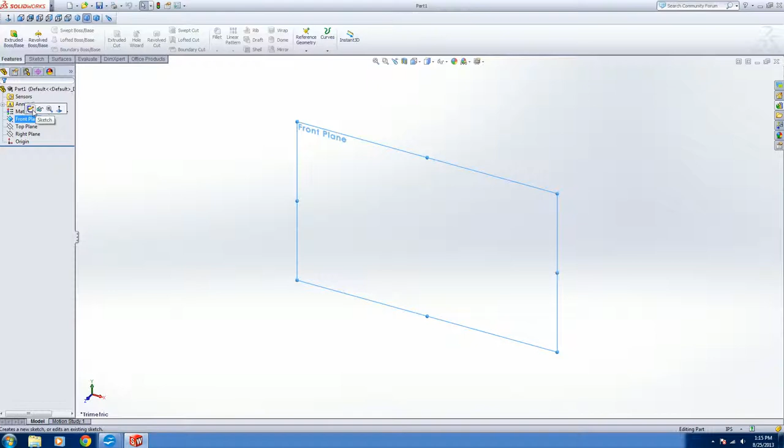The first thing you want to do is select a plane. There's a front, a top, and a right. It currently does not matter, so I'm going to select the front. You may see this little box come up. You want to select Normal To. If you did not see that little box, that's fine. You just come up here to View Orientation, and Normal To is right there. You can also select that. If you select it again, it flips you to the other side. There's not too big of a difference.

One of the most important aspects of the part is that you need to have a sketch. Because we're going to make a cube, you want to select Sketch. Actually, selecting just Sketch doesn't do anything. You have over 12 options. It looks like there's only 12 here, but you can do things multiple different ways if you select the drop downs. So I'm going to click on the corner rectangle, and I'm just going to draw right here a rough square. It's actually not bad. It's one of the best squares I've drawn freehand.

However, we don't know if this is exactly a square. What you can do is select a side, make sure you deselect it like I just did. It was light blue and now it's just a dark blue. And you can change the length under the parameter section to, let's go with 2. Now you see that it has made the adjustment. You can still move it, but when you put that in, it sets it for 2 inches. Smart Dimension, however, locks it into place. If I select this, I can change this value. And not only does it display 2 inches, but it makes sure that it is 2 inches.

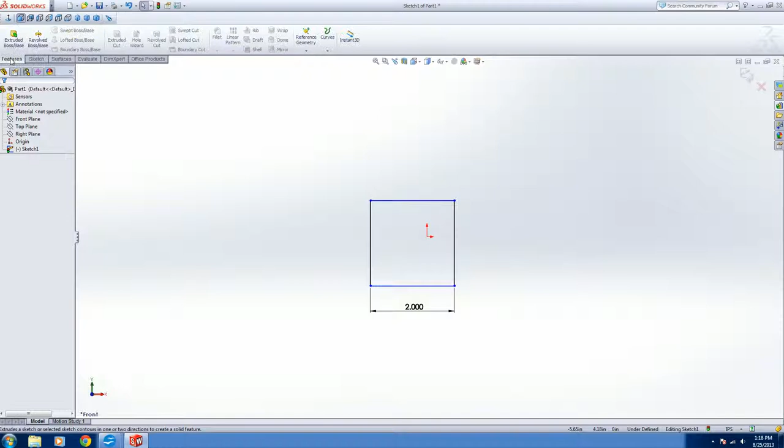Geometry. So what we're going to do is click on this other tab, Features. You're going to select Extruded Boss/Base. And you may notice now that it looks a bit more 3D. There's this yellow square-like thing coming out. This is the extrude, and this is what controls how much is coming out. Here it's only 0.1 inches. Let's change that to 2.

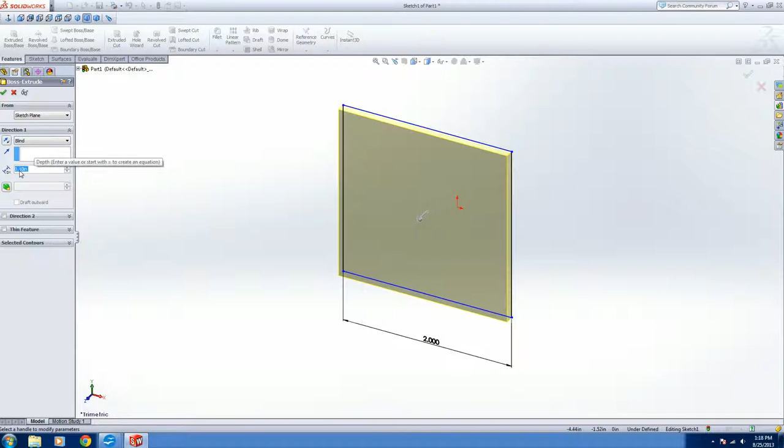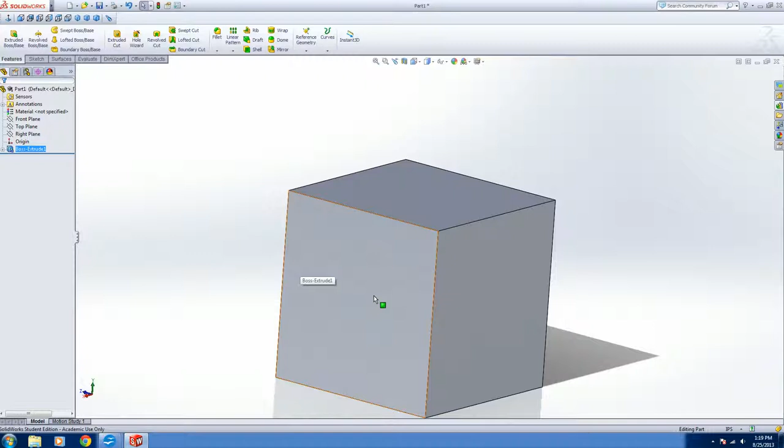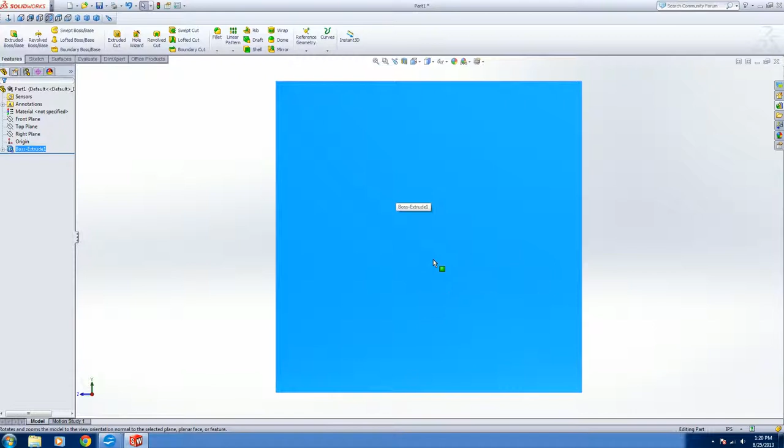I'm going to show you now how to do the extruded cut. Now we extended it this way. For this example, it is crucial that you cut here or on the other side of this one, on the same front plane-ish. Oh, sorry. This was on the right plane, I believe. So I'm going to select this face, and I'm going to bring it Normal To. And now that we actually have a model in here, we can use the faces of our object as planes as well.

So you have this plane, and I'm going to draw this rough square. I'm going to use Smart Dimension on each of these sides. So I'm going to select this edge and this edge. Oops, I did not select the edge. I'm going to select this edge and this edge. And you notice that it pops up a value in between. I'm going to say 0.2. I am going to do the same for these.

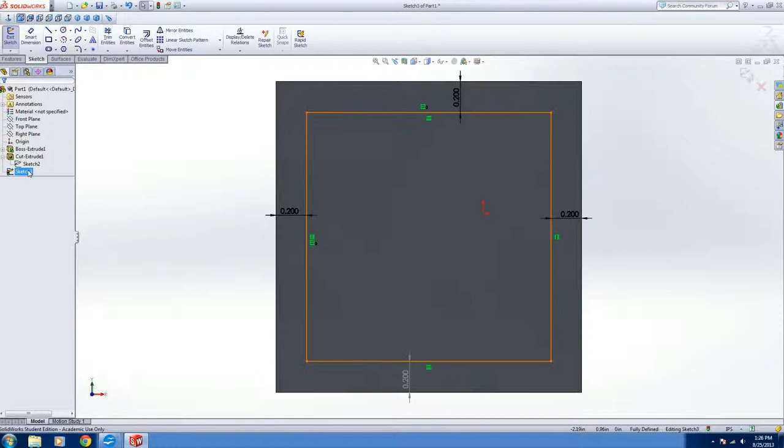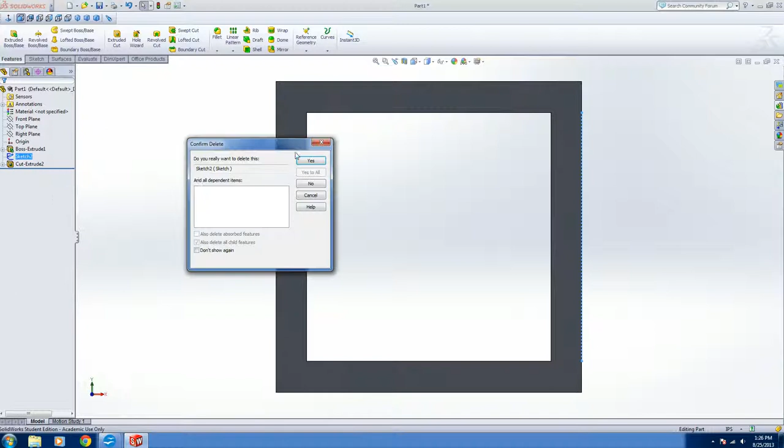Awesome. So, now that we have that, let us select the sketch and let's extruded cut. Alright, there we go. Let me delete this one first, actually. Get a better look at this. Alright, so we have this square that's cut all the way through.

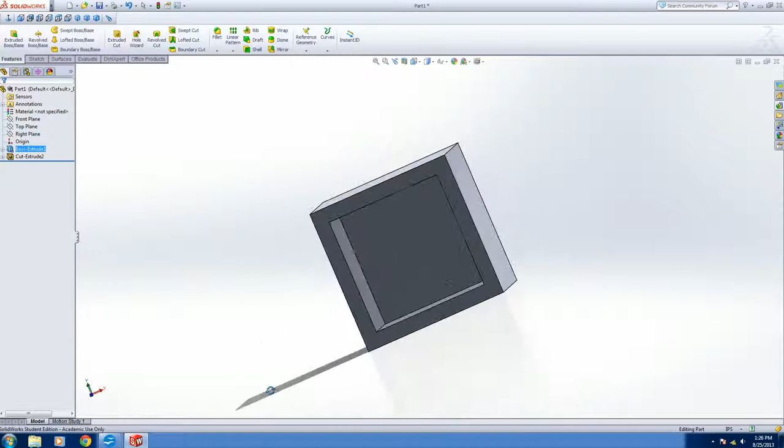But, like I said earlier, what if I went back and changed this to 3 because the measurement I took was incorrect? Let's say 3. It doesn't cut through all the way anymore. Well, I didn't exactly mean to change that, right?

You could go back to your cut, extrude, and edit that. What you do is you click on it, and in this little square you click edit feature. And I could change it to 3, but that wouldn't really solve my problem the next time I fix it and make it longer. So to make sure it goes through all the time, under direction, you want to click on the blind drop down, and you want to say through all.

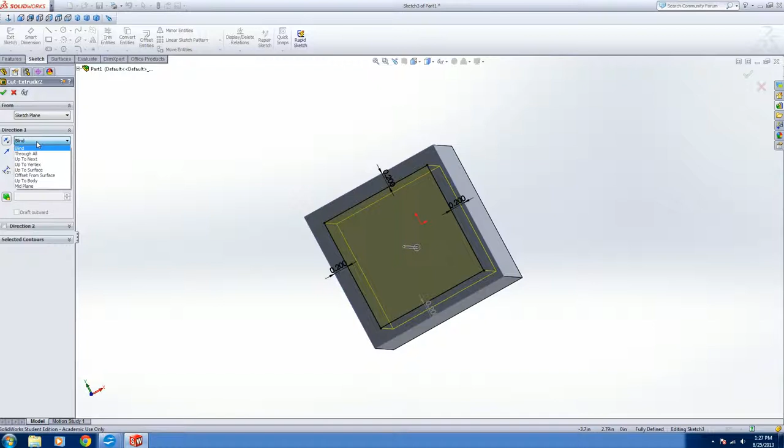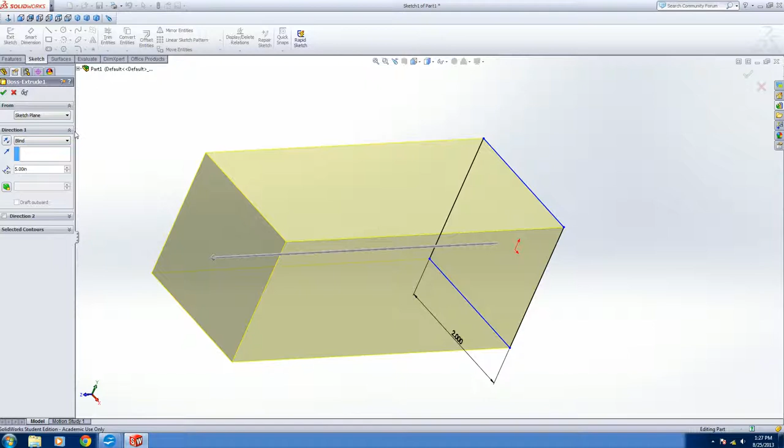So now, every time I change this value to get even longer, I'm actually going to do that right now to give you guys a heads up of what that might look like. It always cuts all the way through.

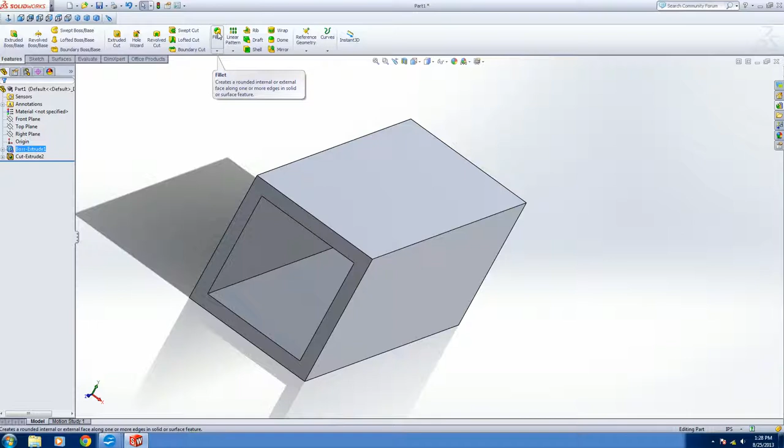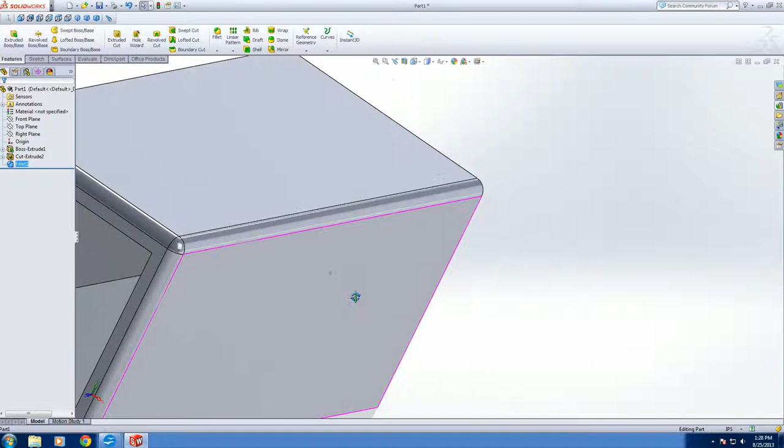So one last thing before we finish up with this cube, I'm going to show you how to use the fillet tool. And the fillet tool, as it says, creates a rounded internal or external face along an edge. So I'm going to select that, and I'm going to click on, like it says, an edge. And you see that it rounds that off. So I'm going to select a couple more sides because I feel like it. I'm going to hit check. And now you can see that it has rounded this off as opposed to these that have not been.

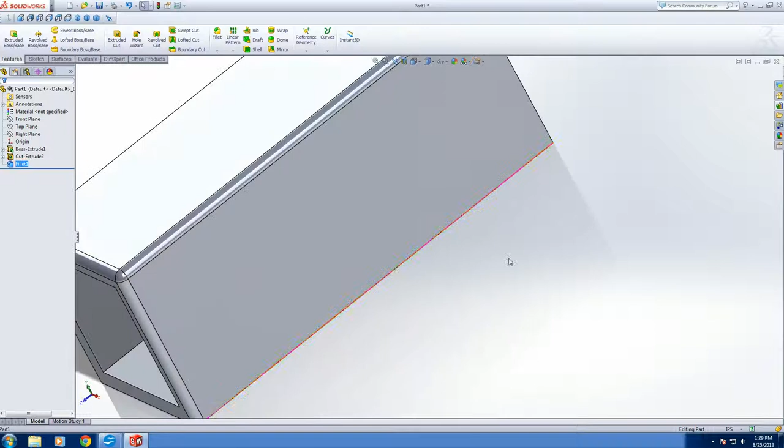If you do robotics and you make your own custom parts, you often notice that you have to always shave off these edges, or when you go to the competition, the judges will tell you to file those sharp edges down. Well, in your CAD program, you can mimic that by making those edges smoother. Alright, that's our first part. You can save it if you want. I'm not going to.

And let's make a new part. I'm going to show you how to use a couple other things under part. So I'm going to hit OK. And let's make a ring, kind of like a donut. I'll even show you what the plan for that is. So I'm going to make it a plastic piece. So I'm going to show you how to draw the part, how to use the revolve boss or base for all of those rounded off pieces, for those circular pieces, and how to change the color in the material.

Okay, so let's select a plane again. Let's go with the front. And I am going to draw a circle. Okay, I'm going to change this diameter by selecting this to 1. Sorry, that's the radius. Geometry skills right there. And under this line, I'm going to click center line. I'm going to draw this line up and down like that.

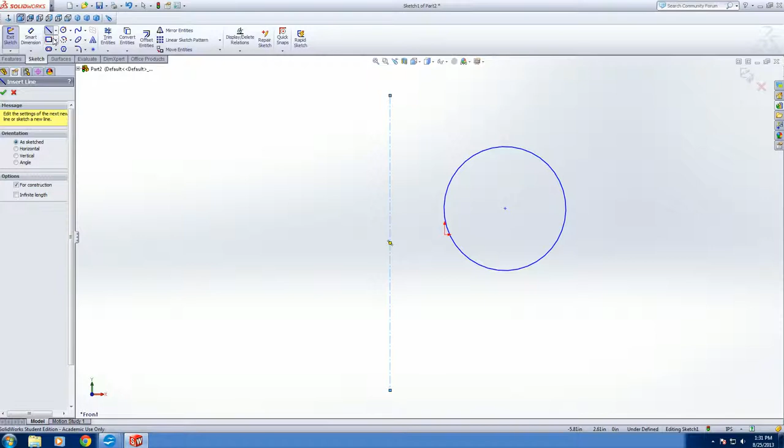As you're drawing lines, you may notice that they have the tendency to lock into place in some areas, like this one locked into place. So that's usually very helpful when you want to get certain things perfectly perpendicular or parallel. It's always a nice addition. So now I'm going to click Smart Dimension. And let's change that to a bigger value, like 3.

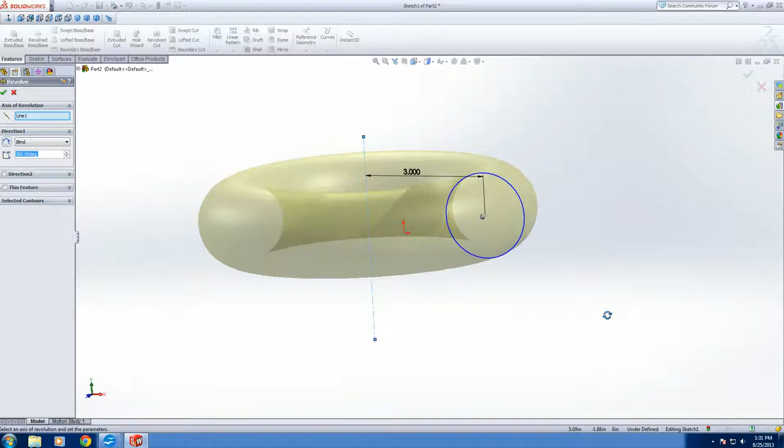Okay, that sounds good. So now that I have this sketched out, I'm going to go back to Features, and I'm going to select Revolved Boss or Base. And now you have this yellow-like donut, which looks really cool, in my opinion. You can also change how much you want to make, like how many degrees it turns. So like I could say 270. And it looks like someone took a bite out of it. Something like that.

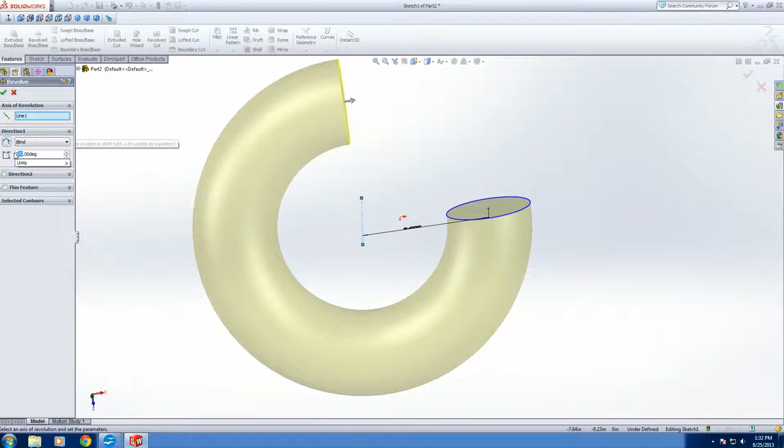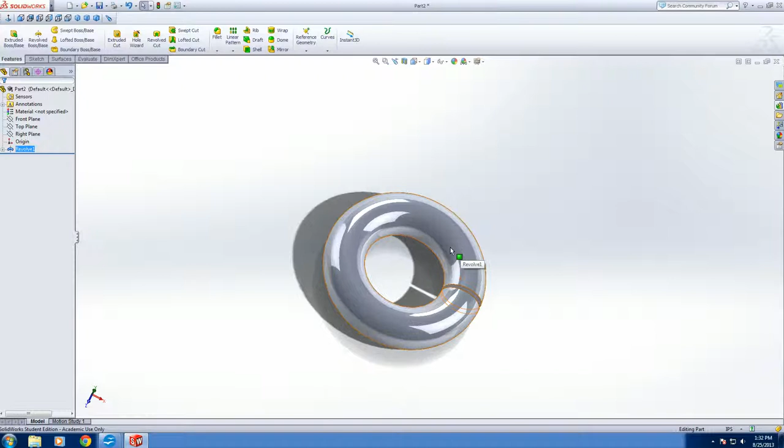So I'm just going to put a really strange number like 356. Put a little cut in there. Why not? So that looks good to me. I hit the check mark. And now I have this donut-like thing. And you may not use donuts or rings in your robot, but you can make curved pieces of plastic this way. You can also draw curved pieces using circles, curves, ellipses, etc., and then just extrude them out. But this is a really easy way to get very circular pieces.

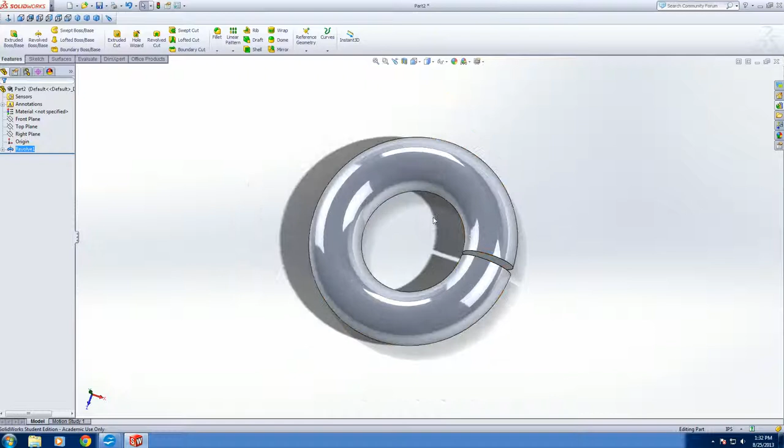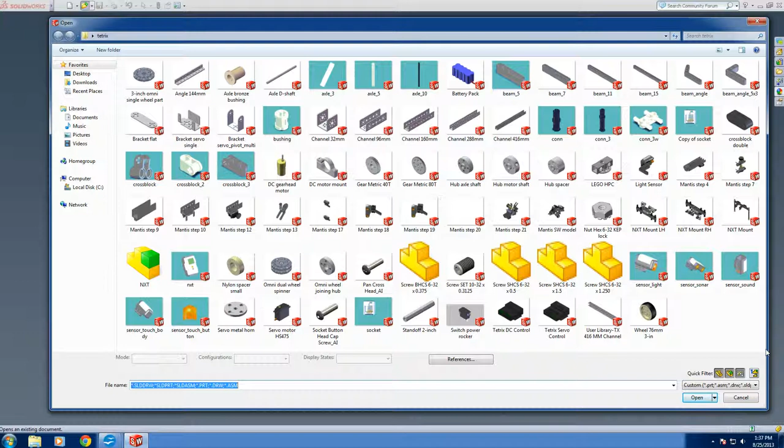We made those last two parts, but maybe you don't want to actually make a part. Maybe you just want to edit one, because through experience I know that a lot of people just cut up those channels like no other. So the lengths of those vary significantly. So let's go back to, well actually, don't open up new, click on open. And what we're going to do is we're going to go and select our 288mm channel. I'm going to show you a couple things to do with it, and I'll show you what I have planned.

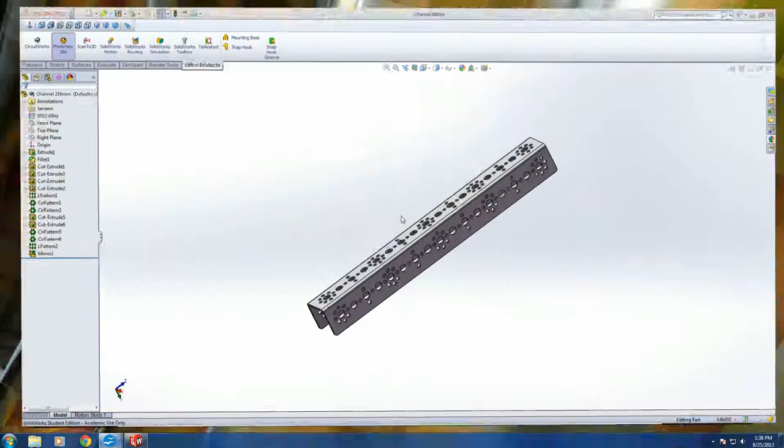So we're going to do two things with it. We're going to cut the part, so I'm going to show you how to cut the channel, and then I'm going to show you how to turn it into the 416mm, because that is not in the Tetrix file that you have downloaded earlier.

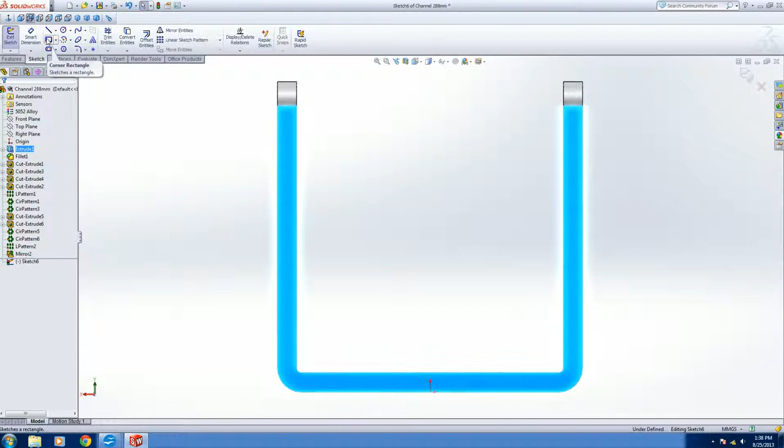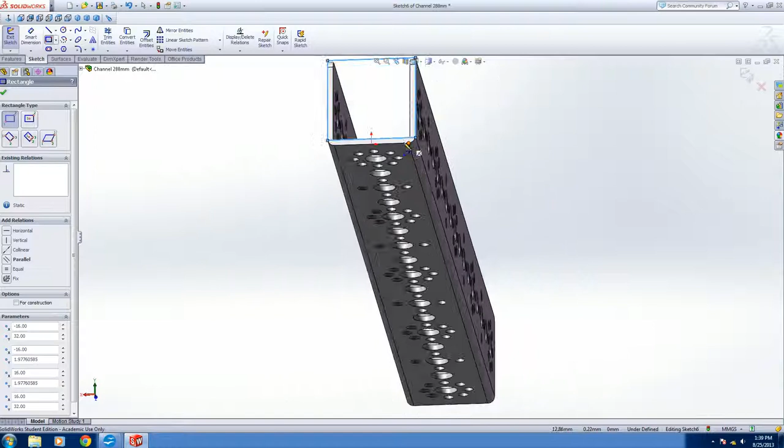So, to cut a part, you want to select a face. So I'm going to bring this one towards me. And now that you have a plane selected, you want to select Sketch, Corner Rectangle. And I am just going to come up in this corner, and I'm going to lob off about something like this. Okay. So what I'm hoping to leave here is just this top piece. And I'm going to go in about 3 inches. So I'm going to leave the top piece and cut that.

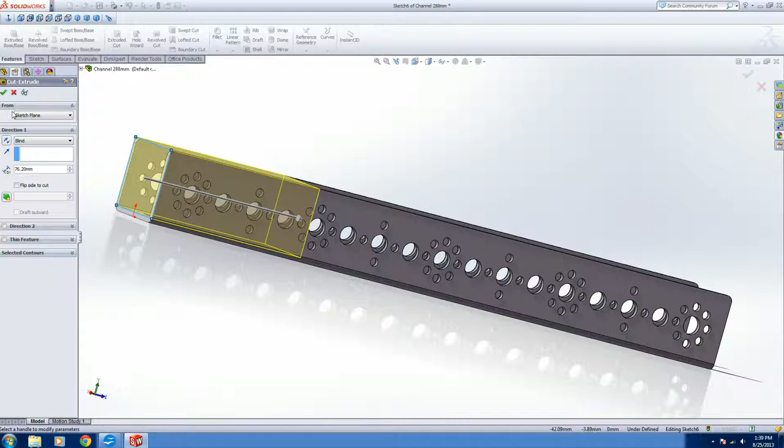So I'm going to click on Features, Extruded Cut. I'm going to change it to 3 inches. Type in the IN. And it shows us this. So I'm going to hit check. Voila! We've left this top piece here, but we have shaved that out. You can also cut from the side. I'm going to show you how to do that too.

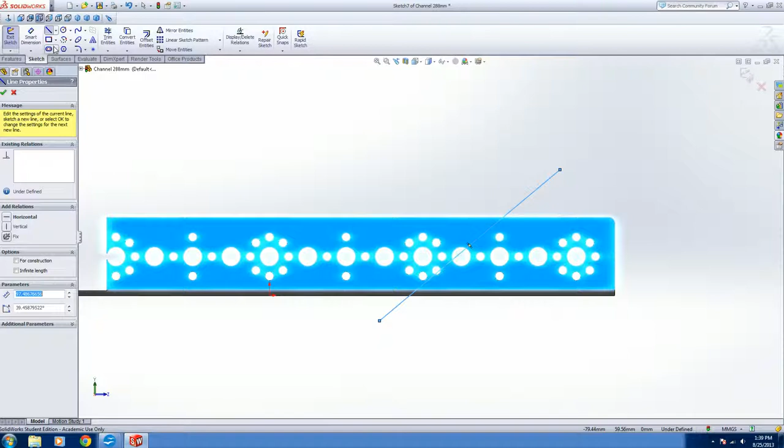Bring this face here. I am going to draw a line. And when you're drawing sketches to cut things out, I recommend you make closed polygons. Well, that's the definition of a polygon, is it actually has to be closed. But nonetheless, you want to make sure that you're not just drawing a line, because it makes it a little easier when you're cutting things. Sometimes it'll complain and ask what to cut, or it says that it cannot cut because it's an open figure, and that means that somewhere in your drawing there's a hole and you need to go through and find it.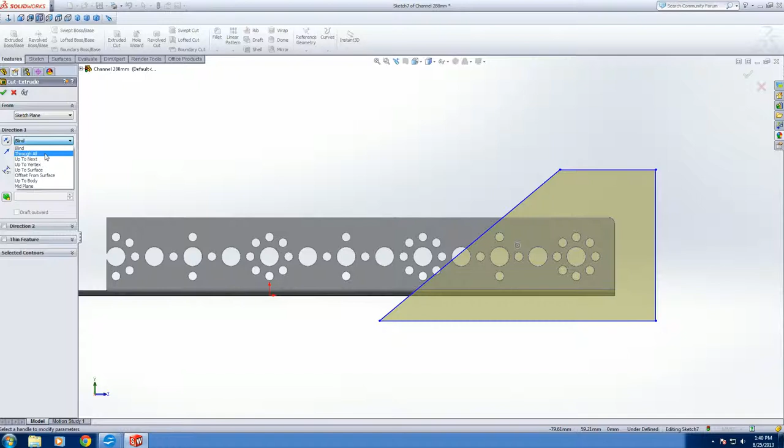But here you go. Now we've cut that end off. If you want to save this, make sure you save it as a different file so that way you don't go over the original. So now that I've done this, I'm just going to undo everything that I've just done.

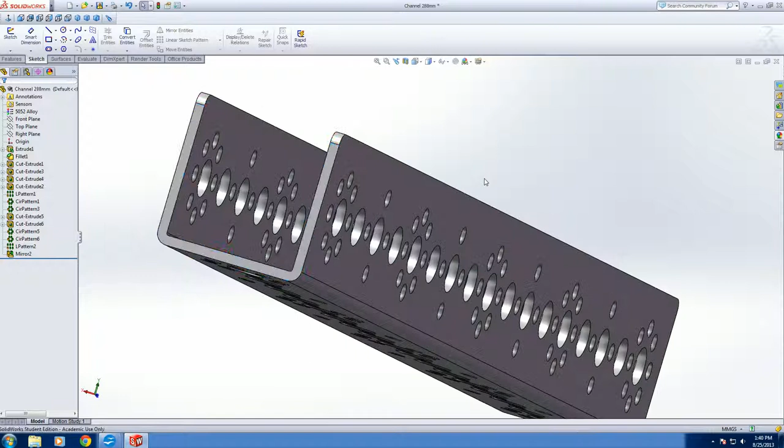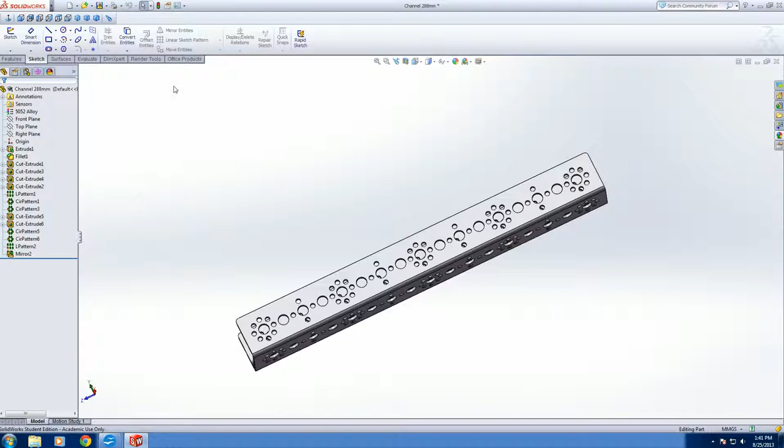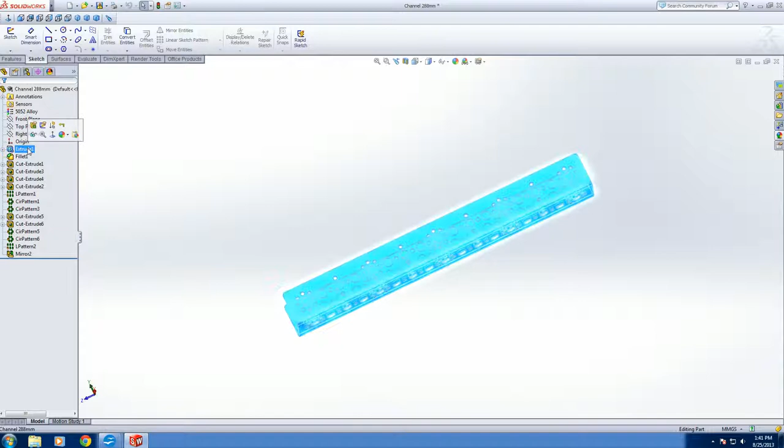Alright. So now I'm going to show you how to make the 416 millimeter long, and this is going to involve editing original actions. So what I'm going to do is when I mouse over these, it shows me what aspect of the part it modifies. Like here you can see these are modifying the holes. So I'm going to select the extrude. That controls the length, and I'm going to click on edit.

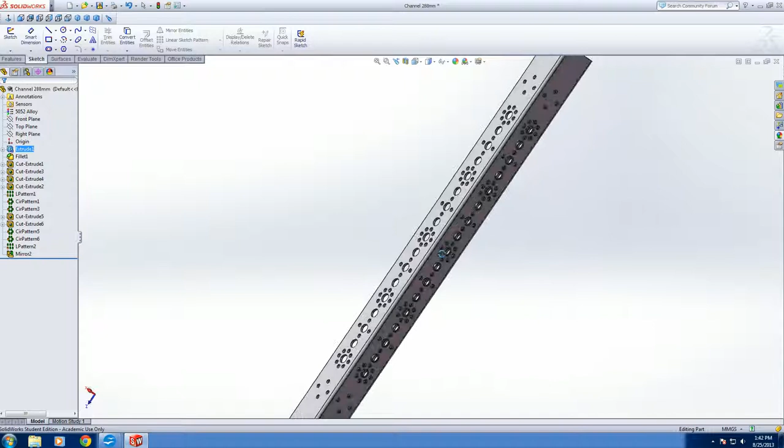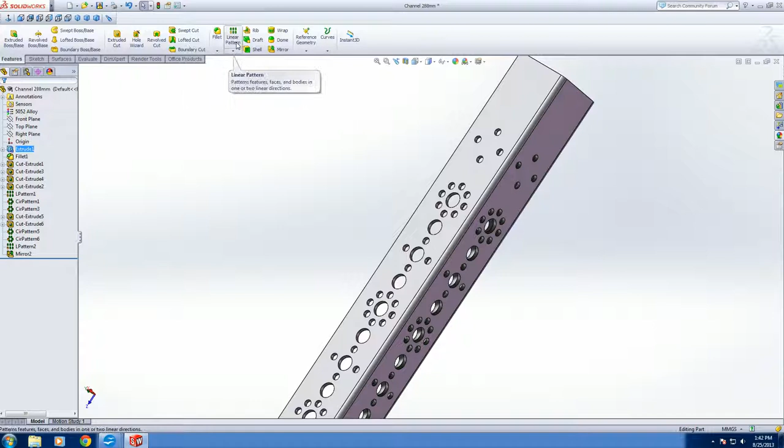And let's change this value from 288 to 416 millimeters. There you go. So now if I hit the check mark, now the holes look all wonky. So what this program uses also is a hole wizard, or pretty much something that helps duplicate holes, so you don't have to draw every single hole over and over. And you can use those such as mirror entities, linear sketch pattern, and in these specifically there's hole wizard, linear pattern, and pretty much you need to play around a little bit with them to understand them a little more.

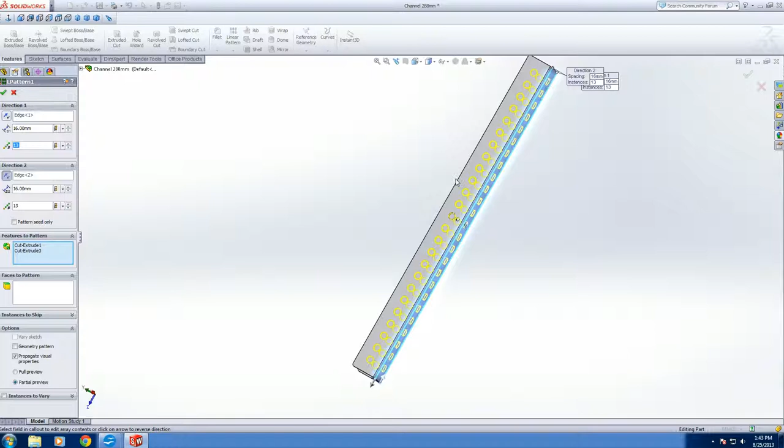So what I'm going to do is I'm going to mouse over to this L pattern, edit. So I'm going to change this value. This says how many holes are going to be on each side. So I'm going to say 13. And see, now the holes go all the way to that end. But that's only one side. What about this one? So I'm going to go to this one as well. I'm going to say 13 as well. So now you see that the yellow circles have pretty much covered this thing. So that's what we're looking for. So now I'm going to hit the check mark.

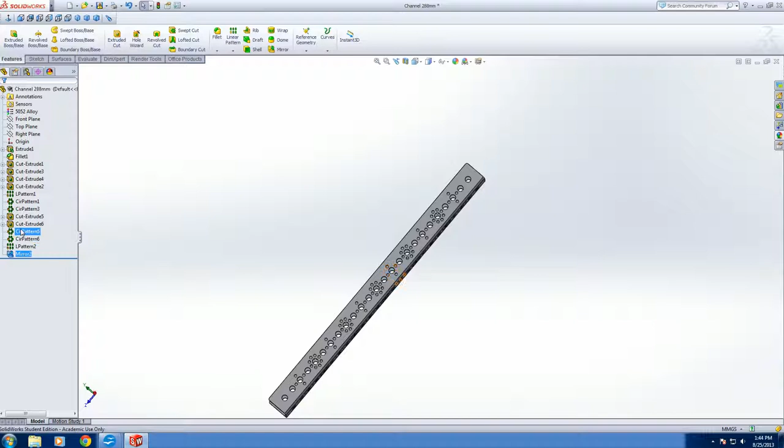There we go. So now we have those holes in place, but we're missing the suns on the end, those having all of these holes around the flowery pattern. So I'm going to mouse over to the mirror. Actually, it's not the mirror. I apologize. The mirror is doing what it's supposed to. It's the L pattern again. So if I go to edit, I'm going to change this from 3 to 4.

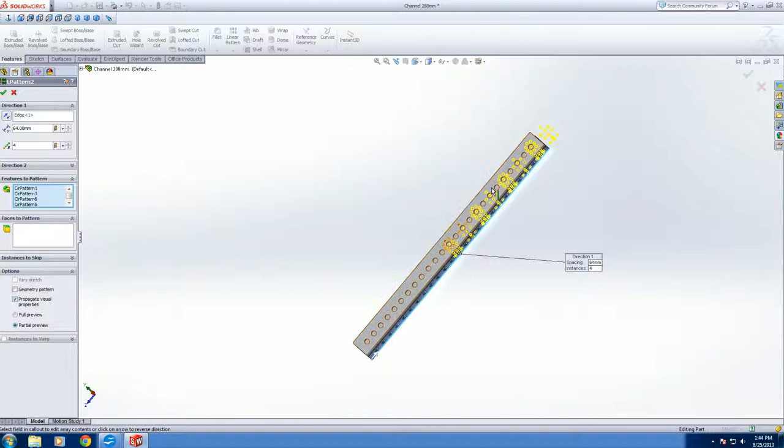And now that I've changed it to 4, you notice that there is a little bit of an overhang, these little 4 dots here. But because there's nothing there, it's nothing to worry about. And when we check OK, this side here will be mirrored, as you saw. That was at the very end that it mirrors this action. So now you have an accurate 416 millimeter channel

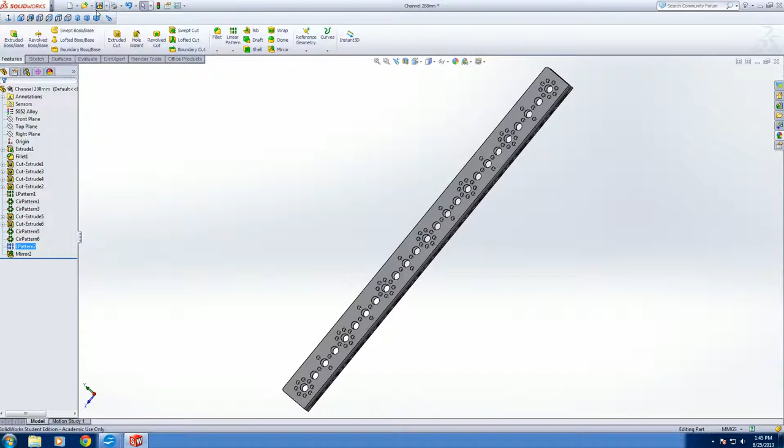that you've modified yourself. So I'm going to click Save As. I'm going to say 416. And I've already done this, so I'm just going to save over it. And there you have it. That concludes this tutorial about parts.